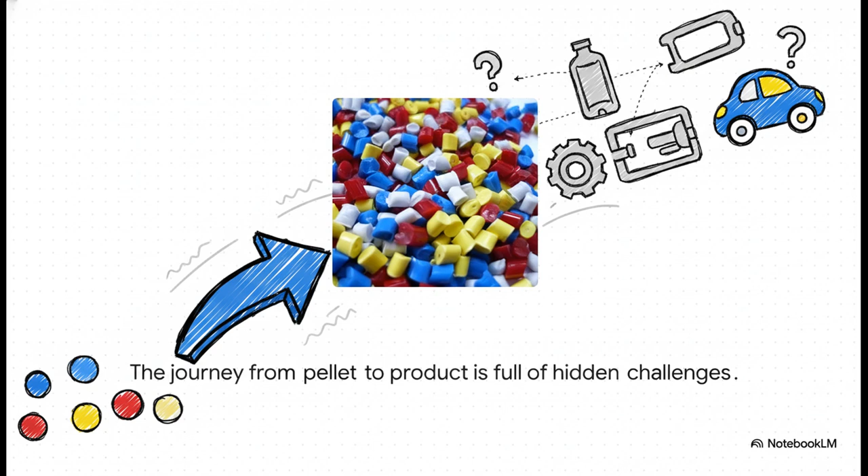Would you believe that every single plastic thing you own, no matter how complex the shape, started its life as just a handful of these little pellets? Seriously, the journey from this raw stuff into a finished product that actually works, well, it's this incredible engineering puzzle, full of challenges you probably never even think of. And that journey from the simple pellet to the final product brings us right to what I like to call the plastic paradox. Just let that sink in for a second.

We've been working with wood and metal for thousands of years, right? We have a gut feeling and instinct for how they'll behave. But modern plastics? They've only really been around for a couple of generations. Our intuition about how they bend, how they cool, how they break, it's almost always wrong. And that is why good design isn't just a nice-to-have, it is absolutely crucial.

So, where does all this complexity even begin? Well, the first layer is just the mind-boggling variety of materials to choose from. 50,000. Yeah, you heard that right. That's roughly how many different grades of plastic a designer has to choose from today. Can you imagine being faced with 50,000 choices before you've even drawn a single line? Just picking the right one with the exact right properties for the job is a massive challenge all by itself.

So to make any sense of those 50,000 options, designers start by sorting them into big families. You've got your thermoplastics, which you can melt down and reshape over and over, kind of like butter. Then you have thermosets, which, once they're heated and set, that's it. It's a one-way trip. Think of it more like baking a cake. And even within those groups, you've got more divisions, like amorphous versus semi-crystalline, and that affects everything from how clear it is to how strong it is. It's a dizzying world to navigate.

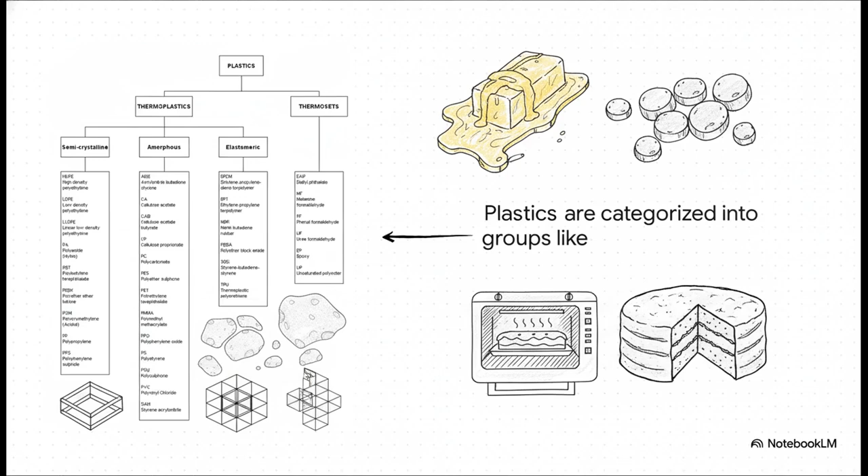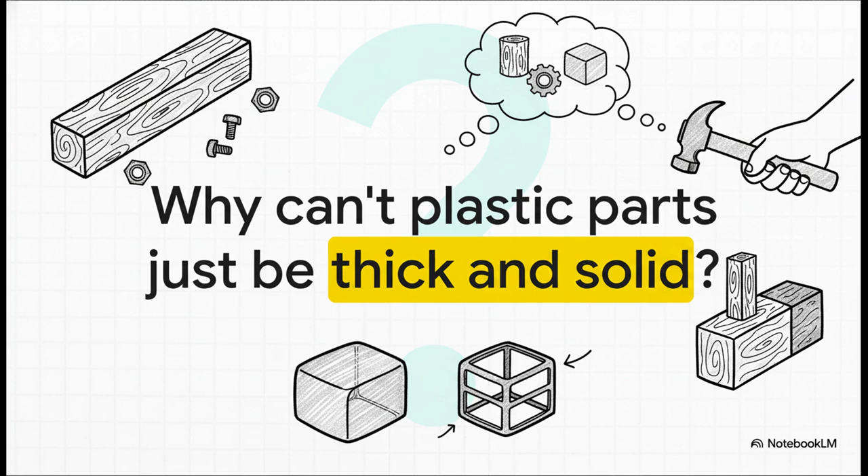Okay, so with all this complexity, how do designers possibly get it right? Well, a lot of the time, it all comes down to one single fundamental principle. You could basically call it the golden rule of plastic design. And it's a perfectly fair question, right? Our intuition, the one we've built up from wood and metal, tells us that thicker equals stronger. So why not just make a big, solid, chunky plastic part to make it super durable?

Because this happens. Look at this. The picture on the left, that's the perfect part, how it was designed in the computer. The one on the right is what actually comes out of the machine. It's warped, it's distorted, it has these ugly dents called sink marks. And the reason is simple. Plastic is a terrible conductor of heat. So when a thick part cools, the outside gets hard first while the inside is still basically liquid. As that molten core finally cools and shrinks, it pulls the solid surface in on itself, creating all those flaws.

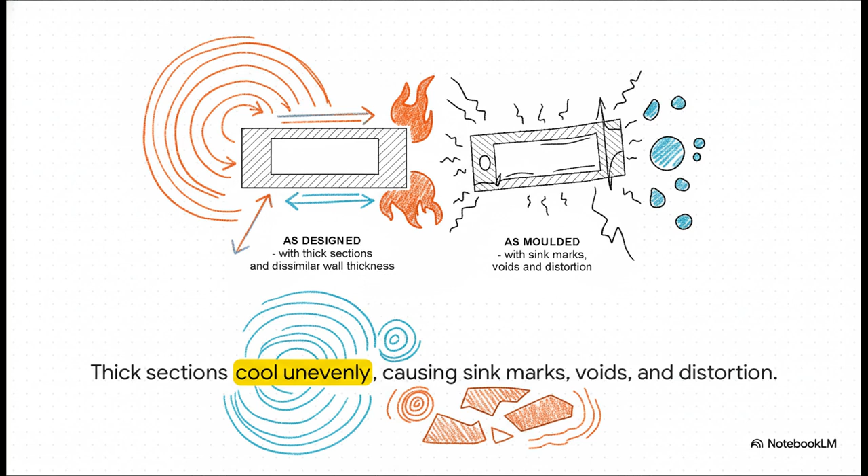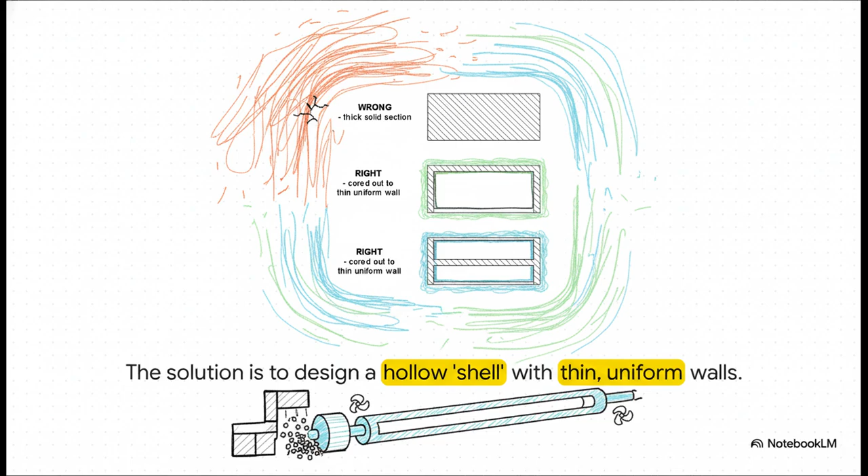So the solution, and this is just brilliant, is totally counterintuitive. You don't design a solid block, you design a hollow shell. By coring out the part, as they call it, you create these thin, uniform walls. That means the whole piece can cool down and shrink at the same rate, and you get a strong, stable, perfect product. And you even use less material doing it. It's a total win-win. Now, to pull this off, designers follow a few key guidelines.

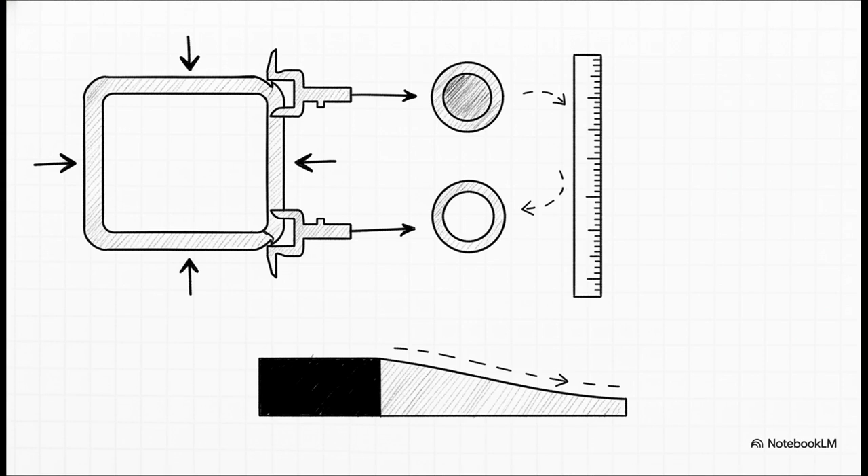The big one, number one, is to keep that wall thickness as uniform as you possibly can. We're talking about a sweet spot usually between 0.5 millimeter and 5 millimeters, depending on the material. And if you absolutely positively have to change thickness, you have to do it very, very carefully. A sudden sharp step from thick to thin is just a recipe for disaster. It basically creates a weak point and makes the cooling even more uneven.

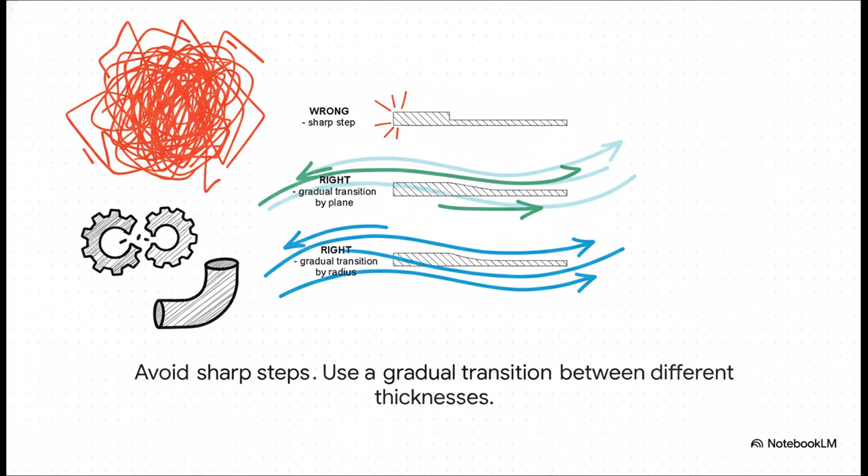So instead, what good design does is use a gentle, gradual transition, like a smooth ramp or a curve. This lets the melted plastic flow nicely and helps the part cool down evenly, avoiding all those internal stresses that could cause it to just crack and fail down the road. All right, let's look at a perfect example of these principles in action. It's something you've probably used 1,000 times and never given a second thought.

The snap fit. Seriously, think about the battery cover on your TV remote. That little clip that clicks into place? That's a snap fit. And it's an incredibly elegant piece of engineering. It gets rid of screws and glue and all these extra parts. It's molded right into the main component, which makes putting things together super fast, super cheap, and super simple. It is pure design genius.

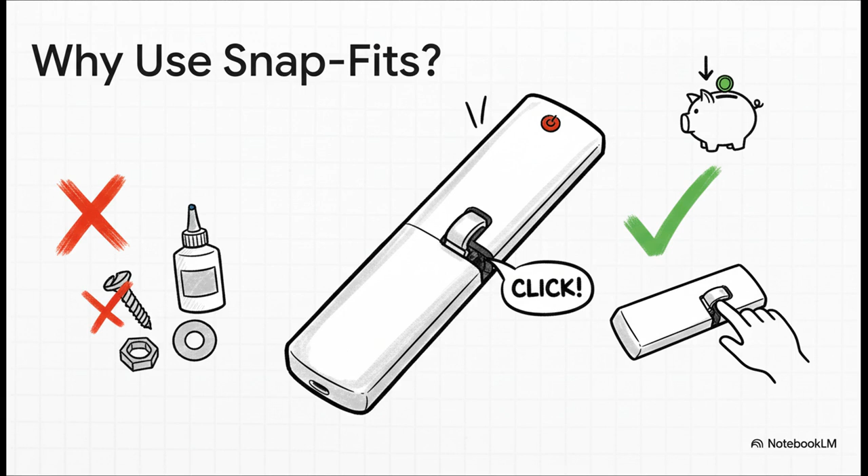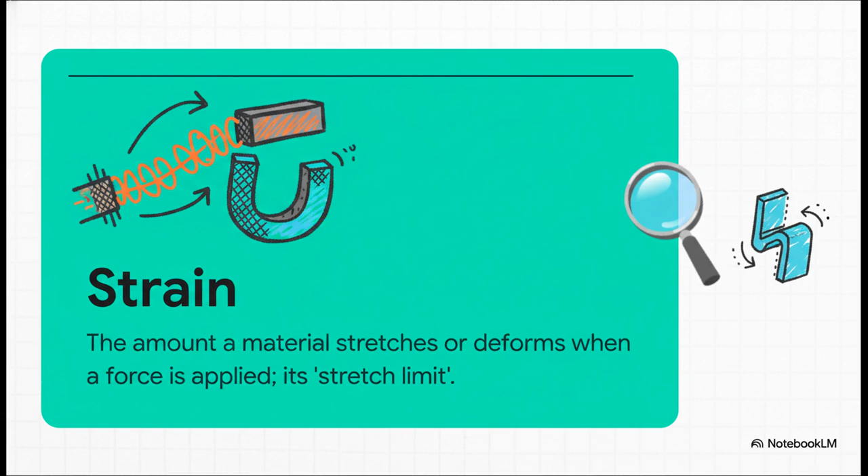So to really get how a snap fit works, you have to understand this one key concept: strain. Put simply, strain is just how much a material can stretch or bend before it either snaps or gets permanently stuck in that bent shape. For a snap fit to work, it has to bend just enough to click into place and then spring right back to its original shape, all without going past its strain limit.

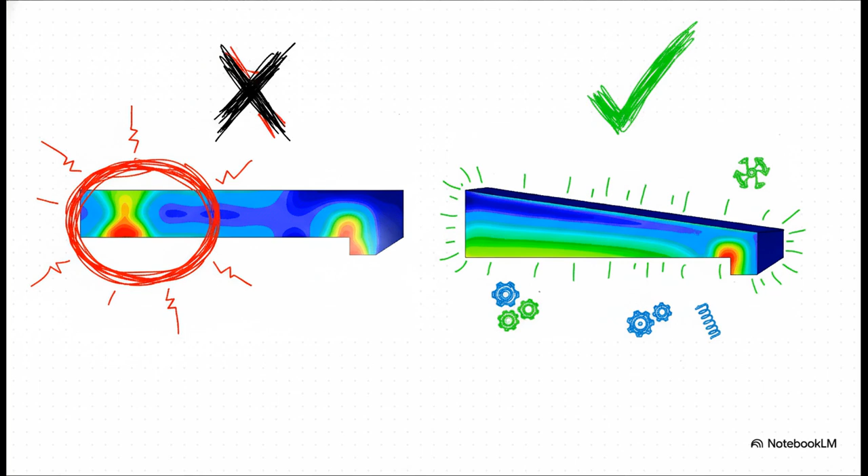Now, look at the design on the right. By tapering the beam, the stress gets spread out much more evenly along its whole length. This simple change makes the clip way stronger and more durable so it can snap and unsnap thousands of times without ever failing. So what's the big takeaway from all this?

Well, it's that the most important parts of design are often the ones you can't even see. Good plastic design is really an invisible science. It's this whole world that's governed by rules that go completely against our common sense. A world where making something hollow actually makes it stronger, and where the shape of one tiny little clip is dictated by all these complex calculations about stress and strain.

So the next time you pick up any plastic object, just take a closer look. See if you can spot the uniform walls, the smooth, rounded corners, the clever little clips. It might just make you wonder what other invisible designs are hiding in plain sight in all the things you use every single day.